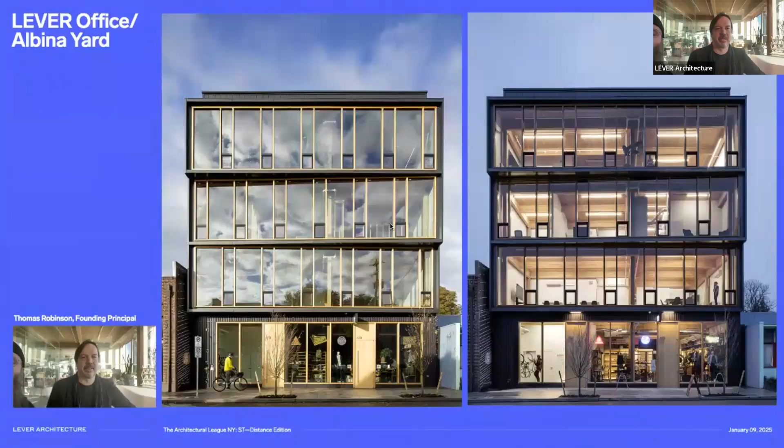I assume you can hear me. If you thumbs up, that's good. Yes, we can hear you. You can hear me and you can see me, I hope. So I think we're good, huh? No, I'm trying to just 1 second. Oh. I had 1 second. Okay. Fine, we're good, I think. It wouldn't be Zoom if there wasn't a little technical glitch to start out. So thanks very much to everyone for being here today.

And I want to welcome you to Lever's office building in Portland, Oregon, where I'm actually sitting. We call the building Albina Yard, which is named after a major rail yard that's about a mile away from here. And this is the front elevation on Albina Avenue in the Albina neighborhood. We're super excited to have you virtually visit, meet our team, and hear about a few projects. I also want to give you a quick introduction to the history of the firm and how our design approach has evolved over time, really through the lens of this building, and then expanding out to talk about a number of projects, many of which are within a few miles of where I'm sitting, and all of which have been completed since 2016.

So this is our office. This is where we sit. This is an early picture, so it's very clean. You'll see some video to show you that it's not this clean anymore. But what was important about it is at the time, it was the first building in the United States to be built with domestically sourced cross-laminated timber. We had to develop details that no one had ever touched before. And this is one of them you see on the right, a detail connector that's very elegant, but also works seismically. We were really interested also in how we could express the material qualities of CLT. So that's cross-laminated timber. You've probably heard about it. And that's the panel you see hanging in the air.

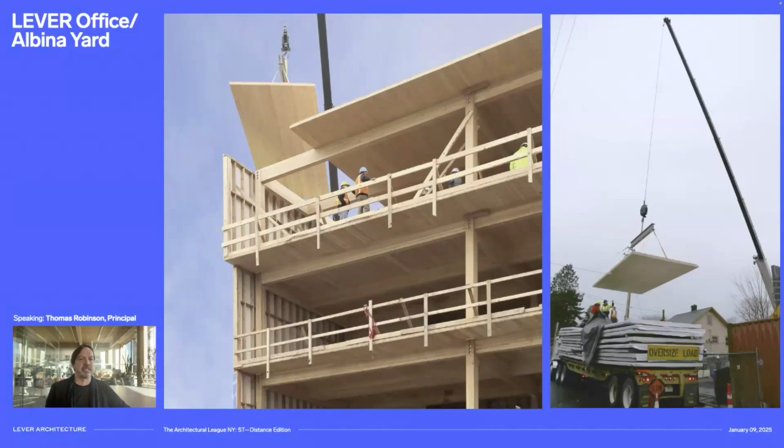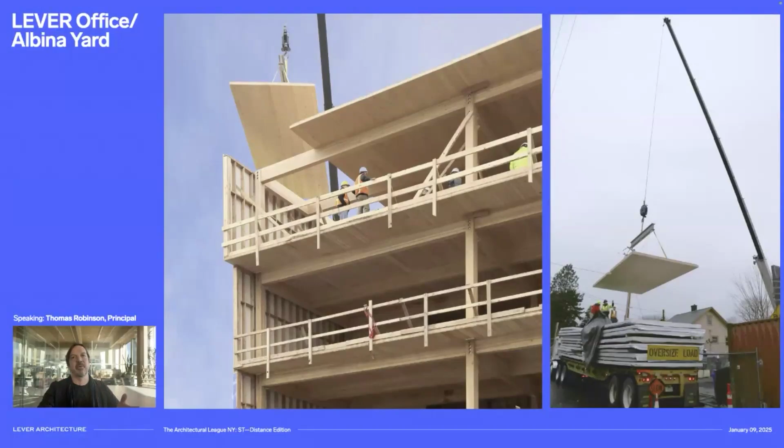And it was really the first time we'd used these materials. So we're like, what can this material do differently that's maybe specific and could have an architectural expression? One of the things we found is that this 4¼ inch panel can actually cantilever 4 feet. So that really became the expression of the building. You can see on the right the first panel being lifted off the truck in this urban condition. And you can see that sense of an undulating presence where you go from 4 feet to 1 foot. That really is, in a way, the one move that defines the character of Albina Yard. So something that's expressive of this material, but also has a presence urbanistically, this idea of thinness, but also strength.

Our site is quite unusual in that it's actually a flag lot. So we were working with the developer, who's a friend of mine, and actually the contractor for the project. We were able to create this courtyard. So there's an existing building on the corner, and the building kind of turns around it.

So in addition to doing this first of its kind mass timber building, we did the first sort of installation of recycled containers in Portland that met the building code. So those containers actually contain offices upstairs, but also a shared conference room for the entire building. And, as you see here, we're walking into that courtyard in the flag lot. And this is really a great space for social events, just getting outside.

Our shop is actually located where you see that neon sign. Originally, there was a bar there, which unfortunately is no longer. But now that's actually where our shop is. And that connects directly to the vertical stair. You'll see the person coming down in the red shirt. There's a circulating stair, which looks like this. That's our main stair. It's also a fire stair that I'll be taking you up later in a little video.

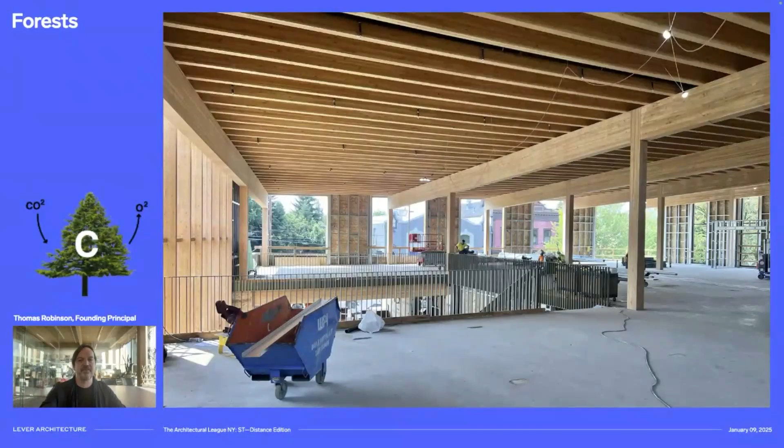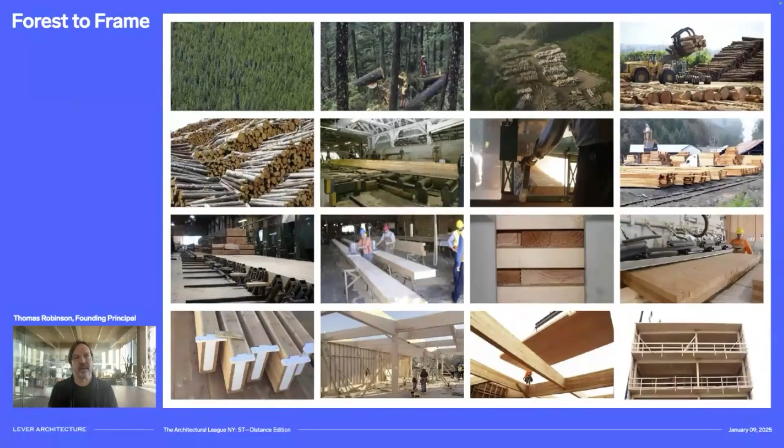And the opportunity and the choice to build with this incredible timber from this region and also other parts of the country that we're working to develop is what we've really leveraged in our work. And in 2015, we came up with a name for this process called forest to frame. It's an obvious play on farm to table, and we don't mean that in an elitist way. Forest to frame is really digging into the supply chain. So this is just a map of forest to the frame. And I'm actually sitting in the top of that building you see there on the right, and really mapping that supply chain and thinking that that's a place that you can actually be creative. And we're really inspired in many ways by incredible chefs that are out there cultivating their own ingredients to think about how they can create new experiences. And we feel that kind of ethic can be really inspirational for architecture.

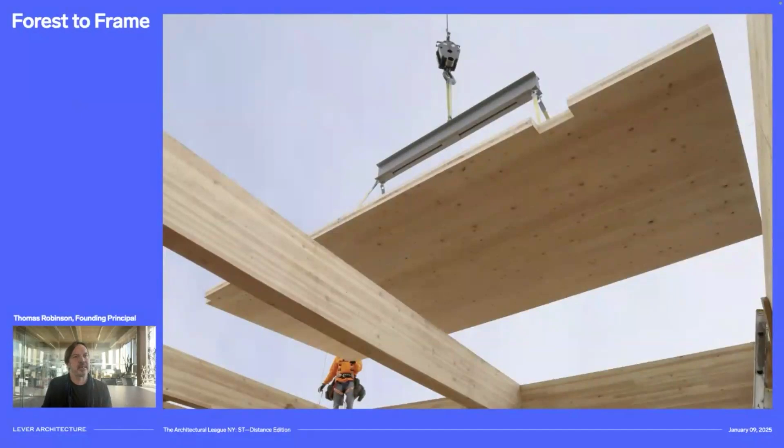So 10 years ago, it's hard to believe, we started to hear about a new material originating out of Northern Europe called cross-laminated timber, or CLT for short. And it's a prefabricated panel you see hanging in the air. And this is a picture I took of this building. And we also were hearing about efforts to fabricate this material in the United States. And a small group of people here got together, got a grant of $250,000, and a glue laminated timber manufacturer took it on and built this press located 3 hours south of Portland that could make a panel 10 by 25 feet long.

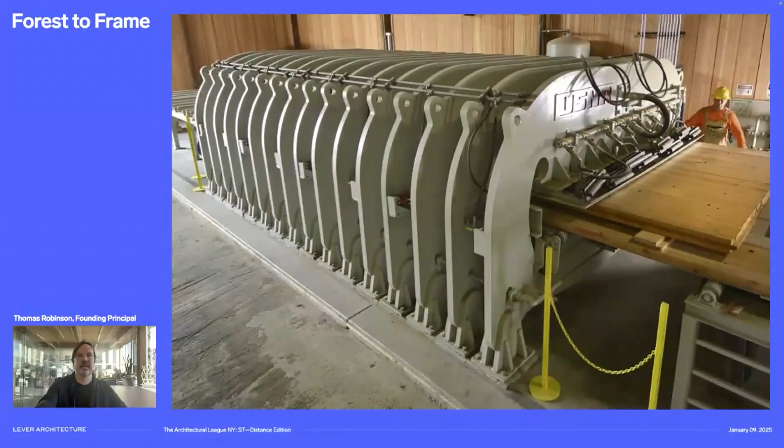And that was like a watershed moment in the United States, that we could actually use this amazing resource locally. So before I take you up into our office, I want to just share my favorite image of this project. It's not of the building itself, because I think it hints at a new way of thinking about buildings that is relevant both here and anywhere where there's that connection to that forest landscape.

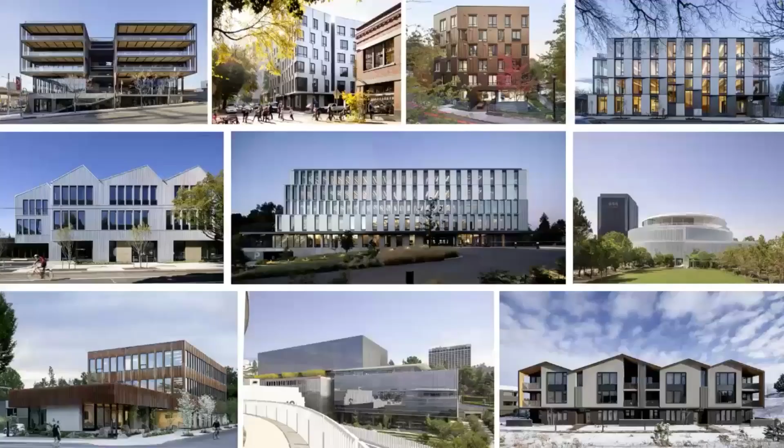So from a handful of projects in 2016, including this one, there are now over 2,000 mass timber projects under construction or built in the US. And that's a pretty staggering amount, and it's continuing to accelerate. So these are some of the projects, timber or otherwise, that all have a connection to that ethic of construction, that are complete. And these are projects that are on the board, about to be complete, or in construction.

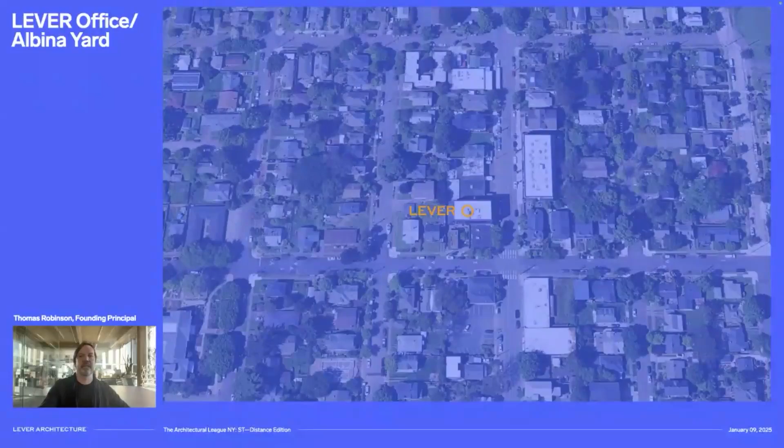And I think that will take you through zooming in here to our office. So you went from that bigger view, and now we're zooming right into our office where I'm sitting right now. And this is a drone video of our office.

And on the left, you see here, there's an amazing coffee shop called Albina Press. And I go there every morning to get a cappuccino. I did that actually this morning. And they're incredible craftspeople. They've actually been here longer than we have, making cappuccinos for 10 years. And I think that idea of craft and experience is something that's really important.

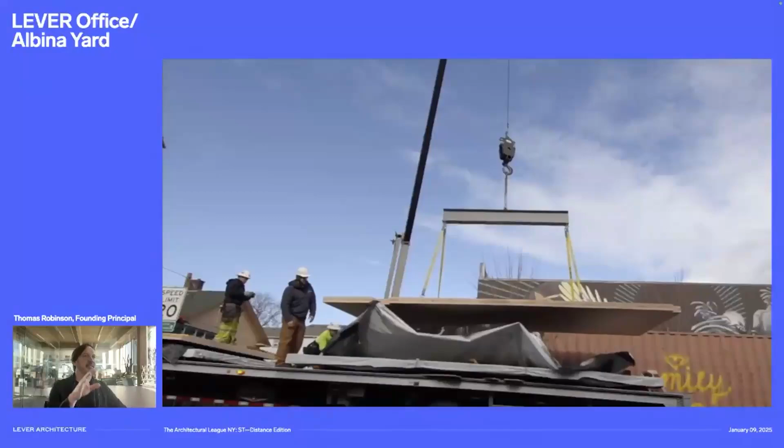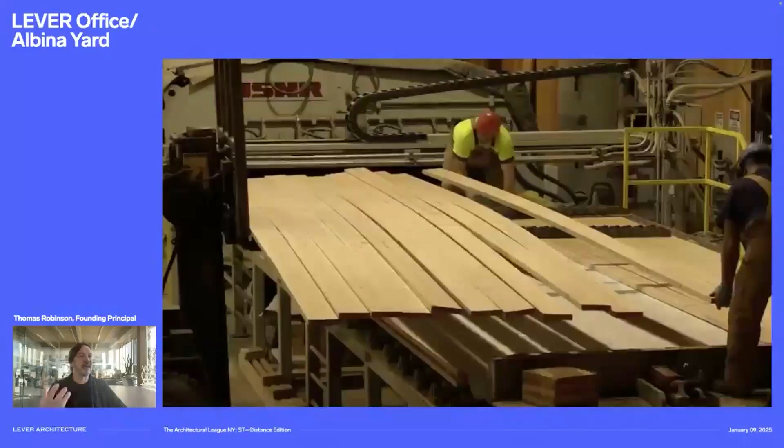And this video actually has an intercut with images of the construction that happened in 2016. So you'll see these panels being installed for the first time in an urban environment. And then you can also see that it was really done by hand. At this time, we didn't have the CNC fabrication that many people have today. So this is really a very specific time where we're really trying to think about how we can do this type of work. I'm actually walking through the courtyard. I'll be going up the stair and ending up in the conference room here.

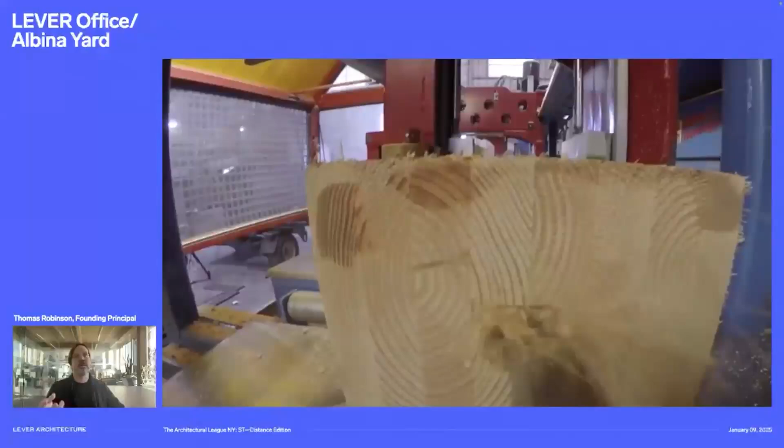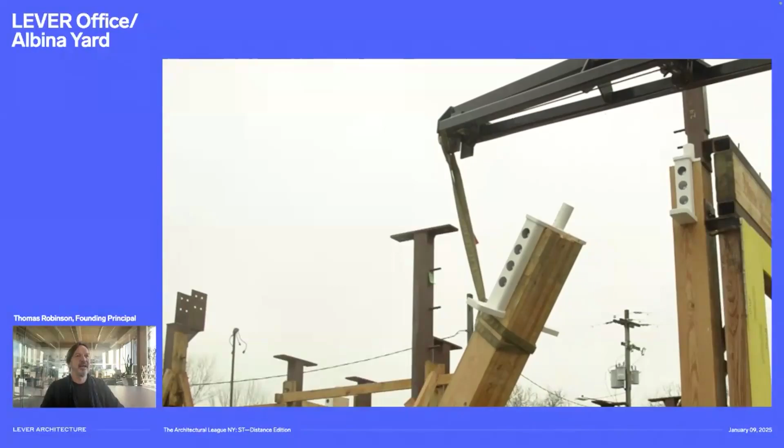We were really fortunate to have in Portland one CNC machine run by a Swiss-trained timber engineer, and this was Stefan Schneider. And he helped us machine these elements that had never been done before. And one of the great stories is that we were talking to the manufacturer. They said, who's doing the shop drawings? And we were like, I guess we are.

So basically we took that on, worked with Stefan, and did the shop drawings for this building, because we realized that for the kind of climate and the culture here, glulams were a commodity. They'd never worked with an architect before. So we really had that opportunity to connect with them.

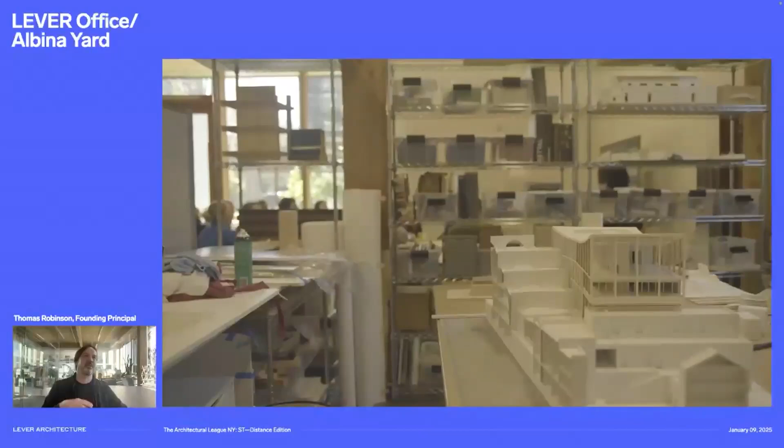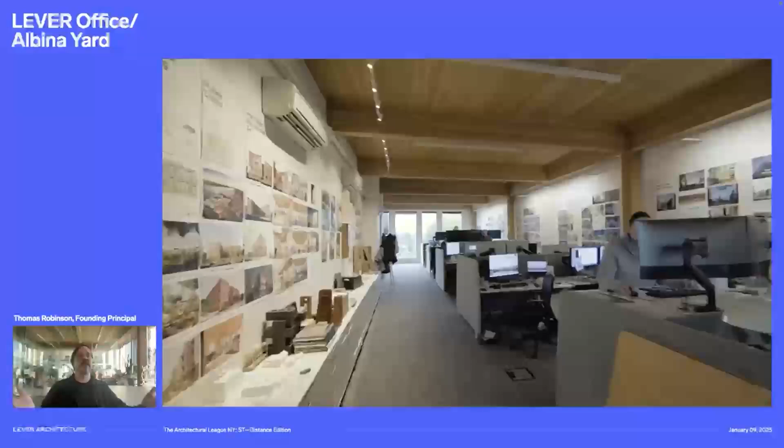This is our model shop on the ground floor that I mentioned earlier in that view. We have a great laser cutter. It's also a kind of kitchen space. And this is just me walking up the stair. I do this pretty much every morning. And coming into the side of the office, which is on that side of the flag lot. And this is a view of what the office looks like today. It's a little messier than you saw in those earlier photos.

We have a kitchen space in the back, but I wanted to just point out there's these amazing details that really define it. And there's also this great smell. When people come into our office, it smells like timber. I don't think we smell it anymore, but other people do. And there's always pieces of material around. And one of the key things we have is a library in the center, so there's always that resource there.

And then this is actually what I'm looking at right now, if I turn my head and look this way: Mount Hood. It always looks way smaller in the photographs.

I don't know why, but it's actually really present in the city and something that's really part of the culture of the office, really that visual connection that we can actually see where the forest is relative to our building. So I'm going to hand it off to Chandra.

All right. This is when we get to do our musical chairs, which is actually kind of fun, very choreographed. Welcome. I'm really so excited that you're all here visiting us in our office.

And I'm Chandra. I'm a principal here and I grew up here in Portland, and I'm really passionate about work that serves the community and work that expresses culture. So I'm going to talk to you about our office culture and about projects that are here in our neighborhood.

So if you were here in our office with us, this is kind of what you would see, people hanging out together. There's a really good mix of different folks here, people with young kids, people who are recent grads, and we really like to hang out together. We actually eat lunch together, not at our desks, but in the kitchen at our table. We volunteer together. We have weekend events and even pack meals for kids on the weekends, which is a really fun volunteer thing that we do together.

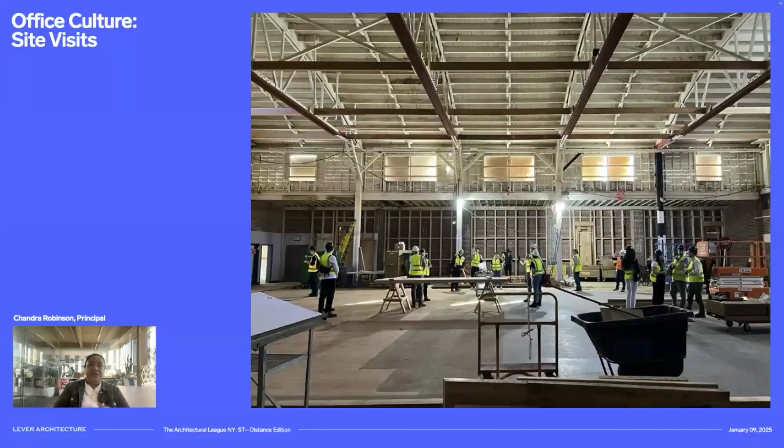And we also do a lot of project visits. And what's really cool is, we're really fortunate to do a lot of work in our own neighborhood. That means that everyone who works in the office has the opportunity to visit all of these projects in person under construction and really see all the time that was spent in the crafting of these details, see them come to life and feel what the building is supposed to feel like, which is not something you get to do as much if all of your projects are far away. So I think we're really fortunate to work in our neighborhood. So again, here's our office, and I'm going to share a few projects that are here in our neighborhood.

Our neighborhood is called Albina, the historically Black neighborhood in Portland. Like in every other city in America, the freeway was run through the Black neighborhood, and a lot of land was taken through eminent domain for reasons they said there was blight, or a hospital needed to expand. So they were taking the land, and a lot of businesses and homes were razed.

Right now you can see all of these projects in this neighborhood that we're doing. There's at least 10 that are really close to the office, and we have more that are farther away, but these are all projects directly impacting people in our community.

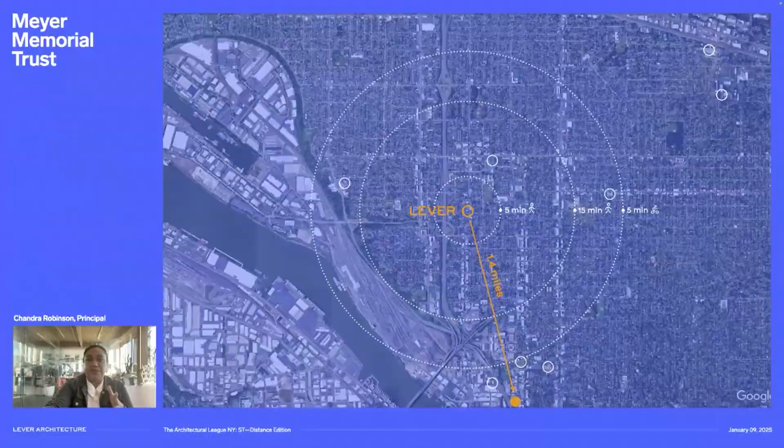So we're going to first go to one of our projects called Meyer Memorial Trust. It's really close to the office, and this is an office project. This is the headquarters for a foundation that works here in Oregon to provide grants to organizations supporting community in different ways around equity, sustainability, and innovation.

The real idea behind this project is that it's very much about equity and sustainable wood sourcing. You can see on the map that all of these different materials we used on the project were sourced within about 70 miles of the project. The reason we do that is so there's an economic impact on all of our local rural communities, so that we're employing folks who are already in our neighborhood, but also so we can understand the sourcing of all these materials and who's actually producing them, milling them, turning them into products we're using, so we understand who we're impacting.

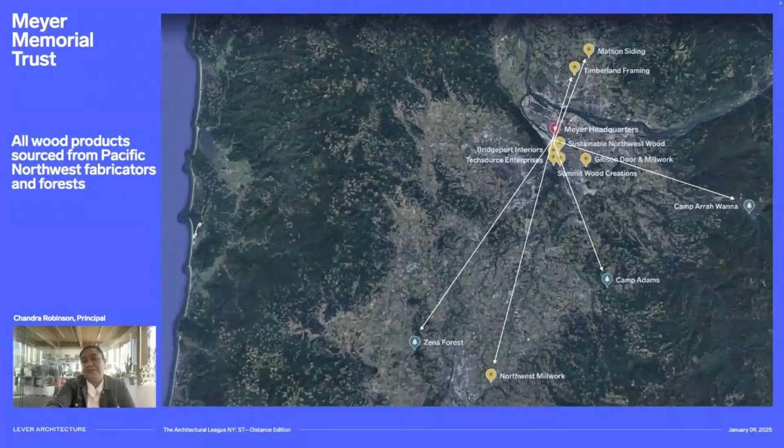We want to make sure we're spreading the wealth around and making sure minority and women-owned businesses are involved, and all of the money isn't just going to the biggest folks who are monopolizing. So all of these materials are coming from really close by.

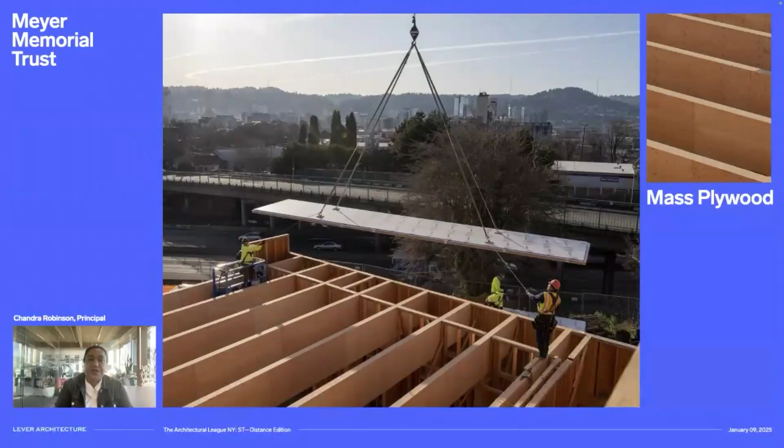Including mass plywood, which is an innovative material that is only made here in Oregon. Using this material is a way to support Oregon, but it's also a way to use something really humble and simple, but you can make it really beautiful. So we have this kind of space that glows with this wood and is not fancy, but is so beautiful and makes people feel really at home.

Some of the other local sustainable wood materials we chose were a locally produced linear wood ceiling product and locally produced wood flooring products that come from a family-run forest here in Oregon.

There's a lot of other things we did in terms of equity and thinking about how we designed this project. I think the biggest and most interesting is that the project is designed so it's partly mass timber and partly traditional stick frame. What that does is it allows us to involve a more diverse group of subcontractors to build the project, because they didn't have to have mass timber experience to work on this. By being on this project and doing what they're comfortable with, the traditional stick framing, they get to see how it comes together and get a foot in the door, so they can get on more projects and be more successful at bidding them.

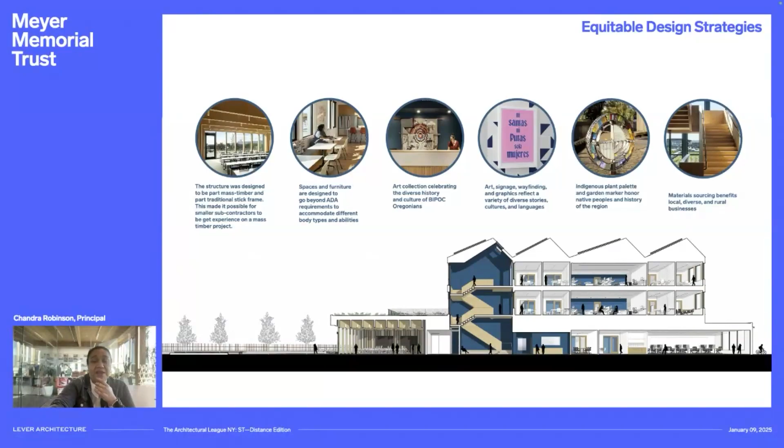The other things we do in terms of equity on this project are that all these spaces are designed with ADA in mind, but going beyond ADA, so all the spaces are comfortable for people of different mobility levels, different body types, and different experiences. There's a lot of really beautiful art in the building that was commissioned by Native American artists, and there's a fully native plantings garden on the outside as well.

So this project did a lot of different things, and it's got some really impressive stats. 80% of the scope of work was done by women and BIPOC-owned subcontractors. And it really started from the top. The client was really invested and wanted to hire a developer and hire Lever as the architect, because we were representing local folks as well and people of color.

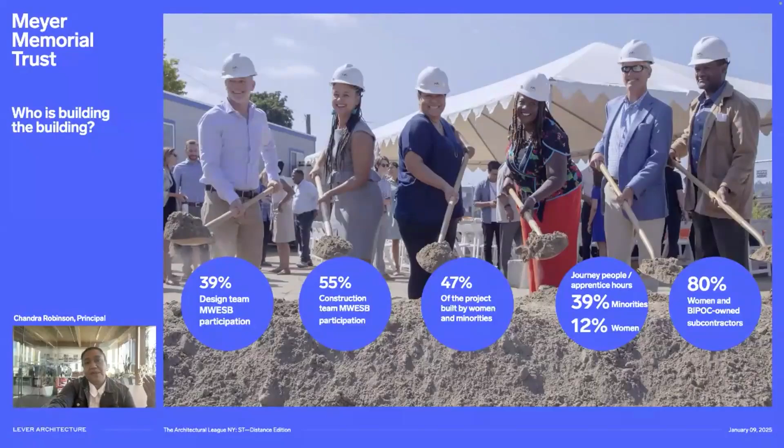It really came down to starting from the top, making these goals, and making sure they were all represented throughout the entire construction team. Really thinking about these spaces and how comfortable they can be, and doing all this work up front really allowed us to take something that was an old tow yard next to the freeway and turn it into something really beautiful that the community can be a part of.

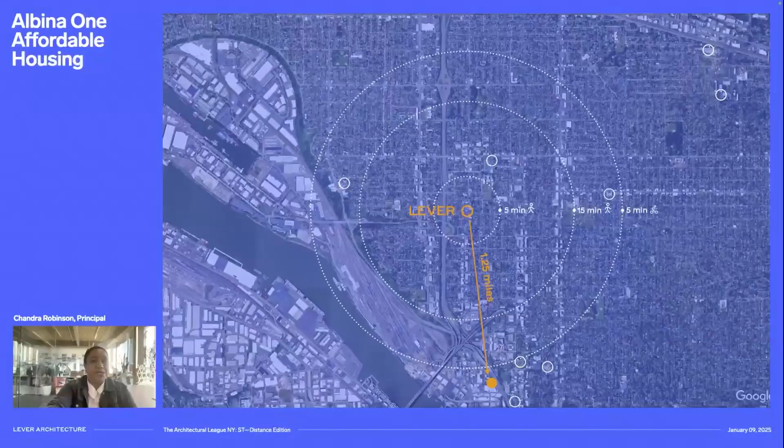I'm going to share a few other projects. That one was complete, but these others are in different stages of development.

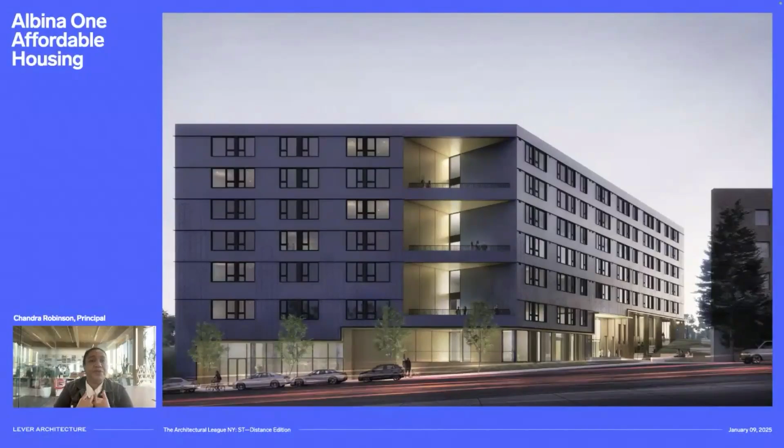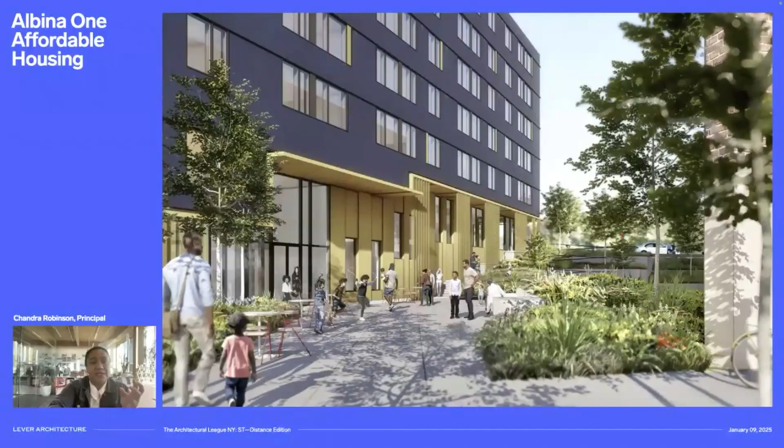This is Albina One, the first project in the Albina Vision Trust Community Investment Plan. It's affordable housing, and it's the first project to anchor a 96-acre area of development that will welcome back folks in the Black community who were pushed out after their homes were razed and businesses taken, and were pushed farther out in Portland. It's an opportunity for people to come back and develop this as a really joyful neighborhood for the Black community. It includes a really beautiful garden for kids to play in and for people to hang out, even though it's right in the city, very urban and next to the freeway, there's this nice little garden and a really special calm space.

Williams and Russell is another project very close by, and this one is not under construction yet. Albina One is under construction, we're working on the facade now. But Williams and Russell is a parcel where it was another one of those where businesses were razed, taken so a hospital could expand, and then 70 years later, nothing had ever happened with it.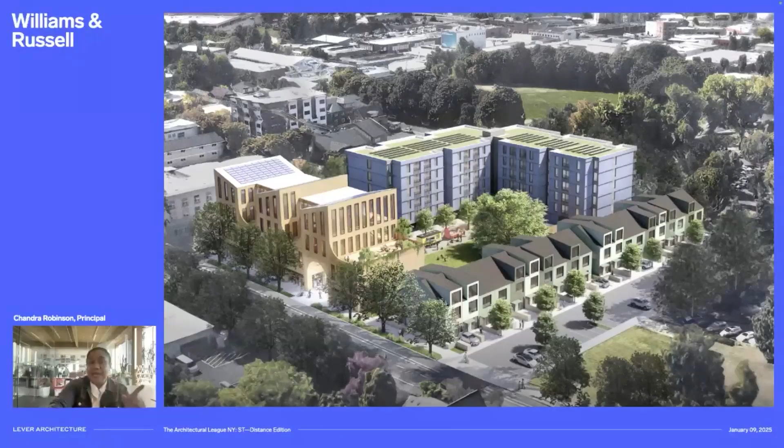So what we're building here is home ownership opportunities, you see those as the green townhouses. There's also rental affordable apartments, and there's a Black business hub, which is an incubator for Black businesses to get going, to get a leg up, and to start really progressing before they move out into the rest of the neighborhood. So we're really excited about this project.

It's so beautiful. And then we've got a couple of libraries as well. Again, these are all in Albina, in the Black neighborhood of Portland, so we're really proud to get to work on these.

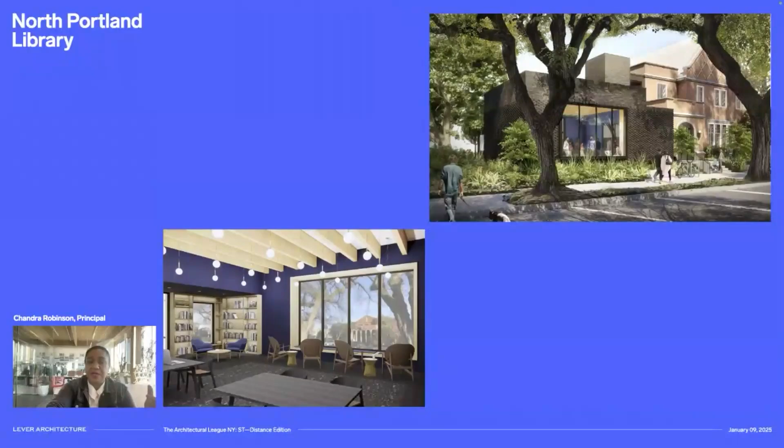This is the North Portland Library. This very small addition is the Black Cultural Center, focused around Afrofuturism and a place for community to come together. It's under construction, they just got C of O, and it'll be open in February with a grand opening. I'm really excited that people are going to get to come in and see this really beautiful space that's been created. And then the Albina Library is another library we're working on in the same neighborhood.

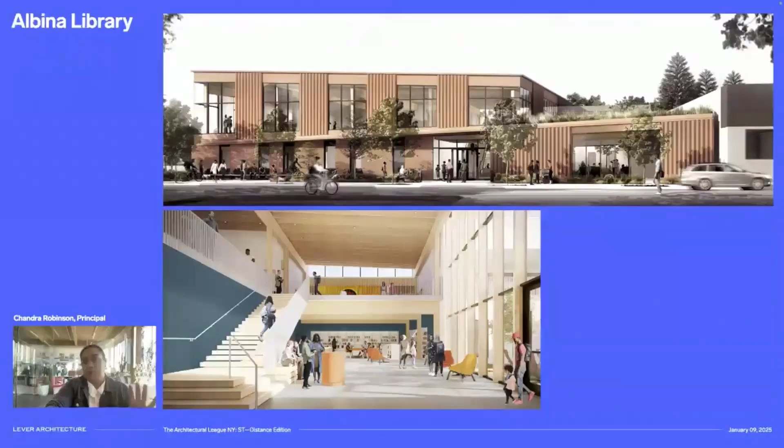This one is also an addition to a Carnegie building, a very large addition, 30,000 square feet. It has a big outdoor courtyard and some really beautiful canted brick on the exterior. We're really excited for this to be done later in the spring.

And now I'm going to hand it off to Michael Gastineau, and he's going to talk to you about Portland State University. Thanks.

Hello everyone, my name is Michael Gastineau. I'm an architect here at Lever, and I'm going to take us now about 4 miles south of our office, across the Willamette River, to Portland State University's campus in downtown Portland.

This is the new Schnitzer School of Art, Art History, and Design. It's a 4-story, 100,000 square foot mass timber structure that brings together the university's various arts programs for the first time all under one roof, which in itself is very exciting. But the project also represents an important investment that PSU is making in their urban campus and the downtown area at large.

We are actually occupying a full city block, and we're situated in a really wonderful location at the south end of what's known as the park blocks, this linear green space that connects the city on this north-south axis. So that site acts both as a gateway to the campus, but also as an anchor to a growing and thriving downtown arts district.

So in bringing all these programs together, there's been a real spirit of connectedness that's permeated the design, and I think has led us and led PSU to want to bring this program out to the urban and the cultural context through the arts.

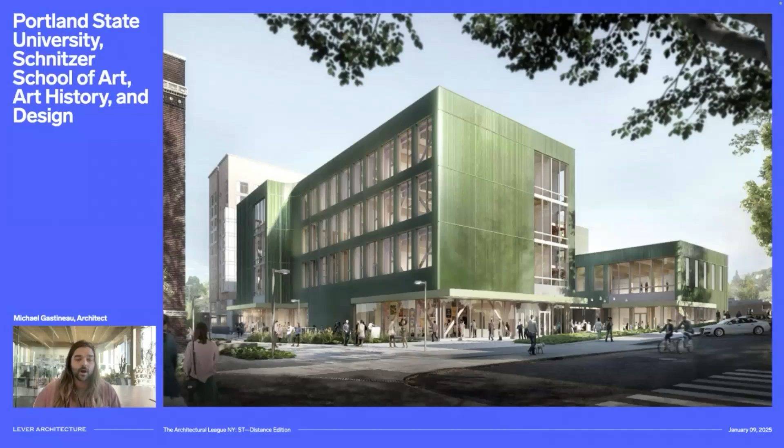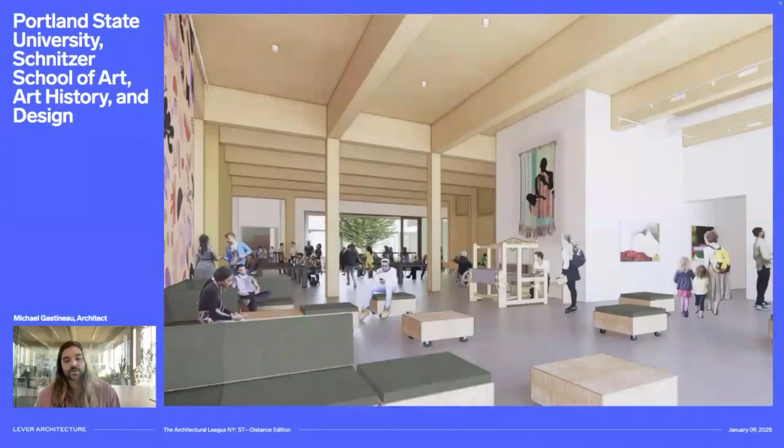Throughout the design process, Lever also worked with a diverse cohort of BIPOC students and educators within the college, and we gathered data that helped inform various aspects of the project, so we understood and explored how we make spaces for learning that are more equitable, more approachable, and ultimately better for creation.

Some of those architectural goals that we came up with included things like ample natural light, things you would expect for an art school, a great connection to the outdoors, spaces that feel like they can get messy and be used. That also led us to organize the program around a series of galleries and common spaces that occur at different scales, but really promote that sense of cross-pollination amongst these programs.

We also employed tall 15 and 18-foot floor-to-floor heights, which allowed us to bring in full height glazing and then bathe these 40-foot deep structural bays with ample amounts of daylight.

But in trying to embody that idea of forest to frame, I think one of the things I'm actually most proud of with this project is that we're able to source the majority of our glulam materials from tribal forests that are owned and operated by the Yakama and the Umpqua tribes, both here in Oregon and in Washington State. And that's a degree of sourcing that wouldn't have been available a number of years ago, but is now, I think very excitingly, becoming more and more of a focus across our projects.

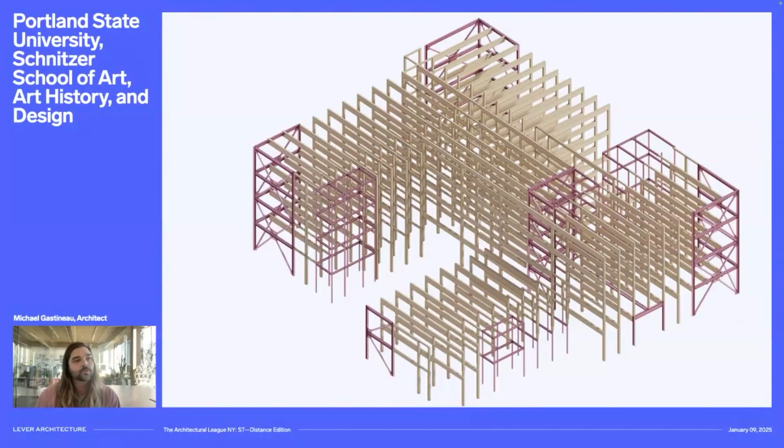At Lever, we're also intensely interested in how our buildings come together, and we try to embrace the mess that comes with that process and have fun with prototyping. Sometimes that means you just got to throw a happy hour.

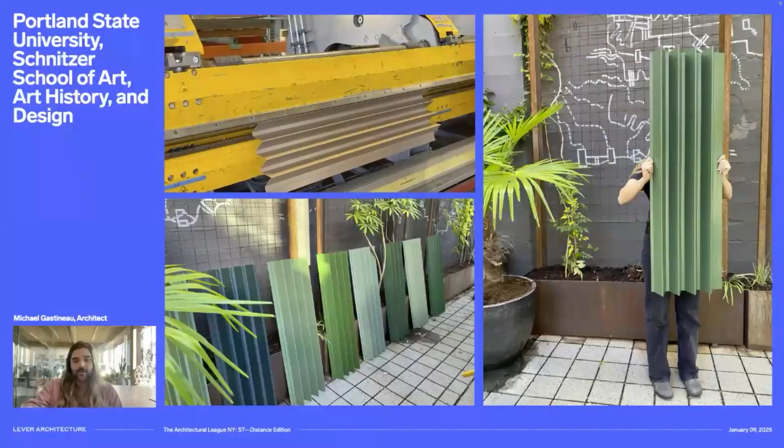So for PSU, we got together with a bunch of our material mock-ups that we worked on and got the whole office to vote on the best shades of green for the project. Aptly enough, the winning color that you see on the right there was named Doug Fir Green.

We are currently under construction and broke ground last fall.

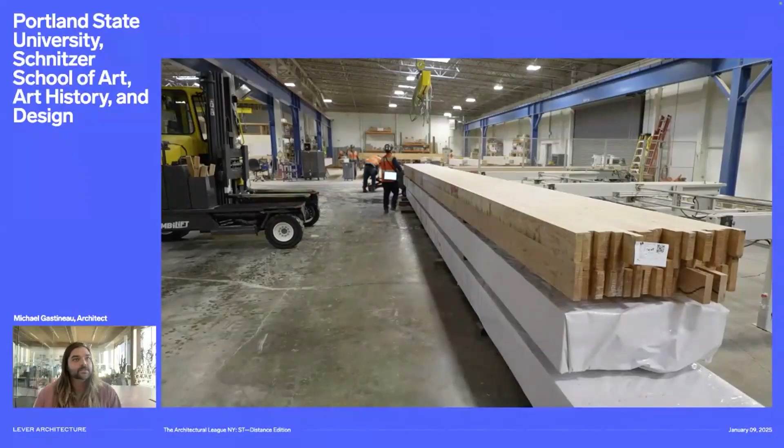So I'm going to take us now to look at Timberlab facility in North Portland, where our glulam materials are being finished. You'll see our 40-foot long spanning glulam beams, a number of various glulam columns, and various fittings being installed. Timberlab is able to achieve a 1/8-inch tolerance with these materials, which is really incredible.

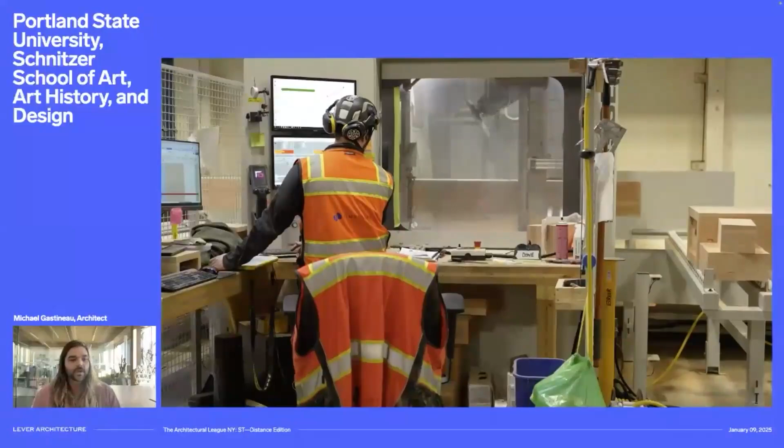One of the ways that we facilitate that is this in-depth pre-construction and coordination process where quite literally every bolt, every connector is independently modeled and accounted for. And in our case, I think we had almost 1,000 CLT floor penetrations that were also organized and coordinated in advance.

But I should say for all of the high-tech processes that we engage with, I think at the end of the day, my favorite detail on the project just ended up being the old-fashioned mortise and tenon connections that we employed for our primary glulams.

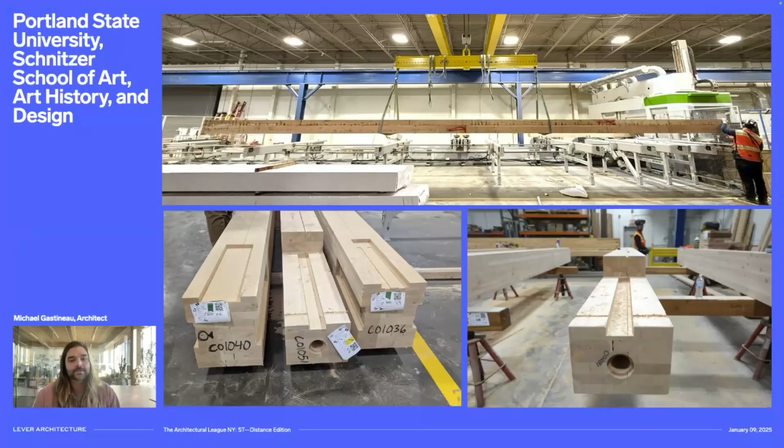So we are scheduled for completion in May of 2026, and we're all super excited to be seeing the building come to life. Thank you all.

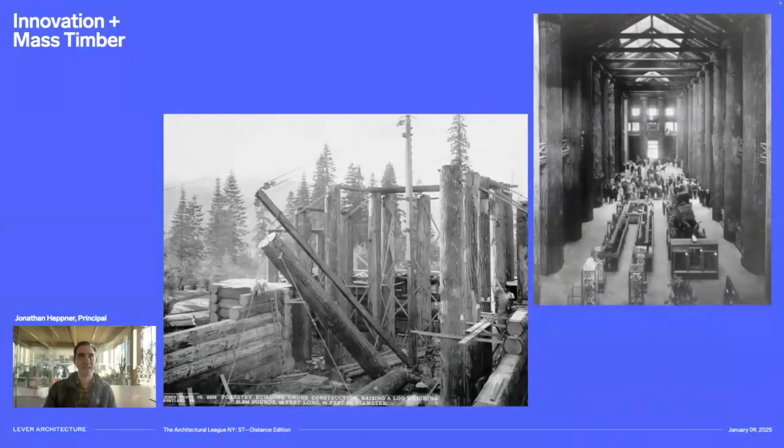Our journey in timber research really started in 2015 when Lever was awarded the Tallwood design competition that Thomas mentioned.

So this is for a 12-story high-rise that incorporated this rocking wall core, which is really fascinating, and I'll talk about a little bit more later. But the competition organized us to demonstrate that building high-rise structures like this were possible in high seismic areas. And it included $1.5 million of grant funding to do full-scale testing.

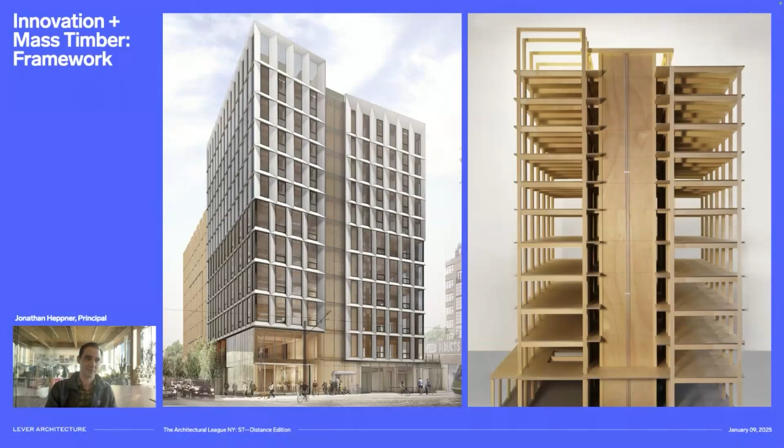And if you're interested, there's a model of this in New York and some other mass timber projects at the Skyscraper Museum through the end of this week. So check it out.

So I was fortunate as a part of this to be able to do 40 full-scale tests around the country for acoustics, structural, and fire testing, so that we could demonstrate that this would be something that's codifiable. And the results of these were all made public, and really led to the adoption of the Type 4 building code that we're starting to all use around the country now, as well as the project getting permitted in 2017.

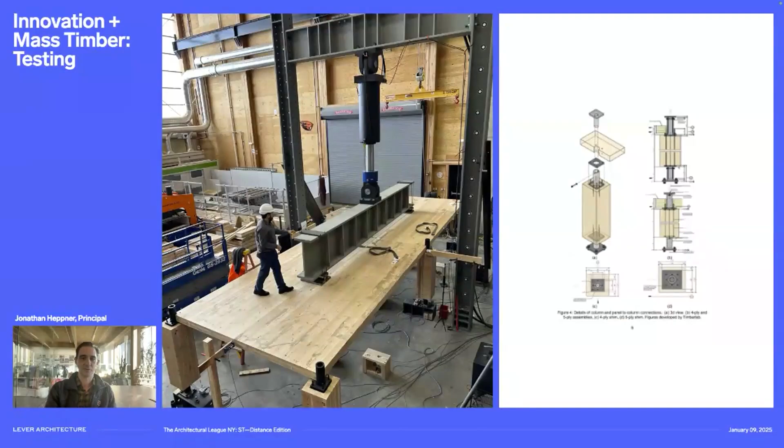So this is an example of some of the testing that we're doing currently over 8 years later. This is for a 12-story point-supported high-rise structure in Portland that is going through permit right now. So with that in mind, I'll share 3 projects that show a few other examples of how we look at our research in the office.

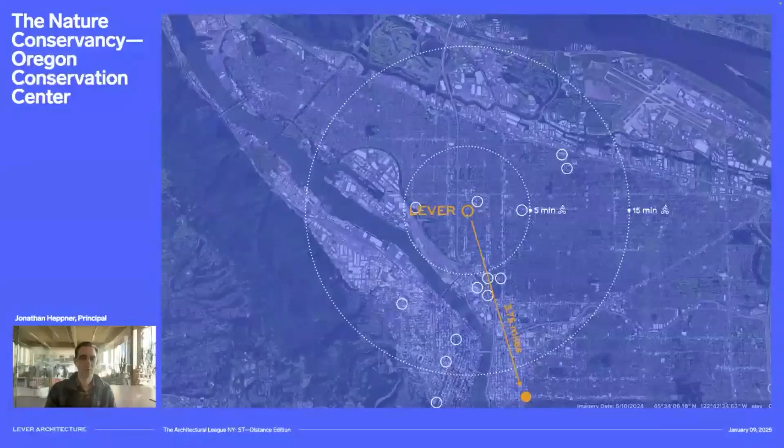And I'll start with the Oregon Conservation Center, which is the state headquarters for the Nature Conservancy. It's about a couple miles from the office. So the Nature Conservancy really wanted to have a building that embodied their values. And so conservation and restoration are key to their mission. And they wanted to also signal their presence in Portland.

So at the time of the project, they were occupying this nondescript building that was actually a former parole office, and nobody knew where it was. So instead of tearing that building down, we really wanted to look at it as an opportunity for restoration that was similar to their values. And so we looked at how we source materials very carefully.

So this diagram shows a few of the different conservation sites, the smaller bubbles down below, for landscapes that they manage in Oregon. And we wanted to take the materials that were in these landscapes and demonstrate their use within the building. So for example, the material of the outdoor roof deck, which is an FSC certified cedar board, is harvested from a site in Willapa Bay where they have a restoration project to sustain and protect old growth.

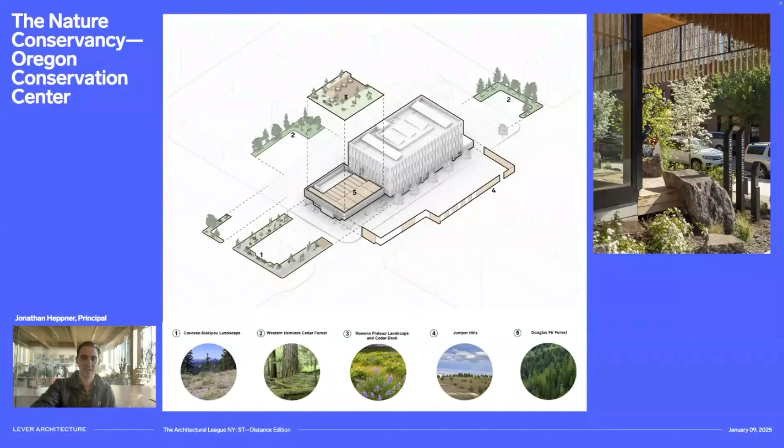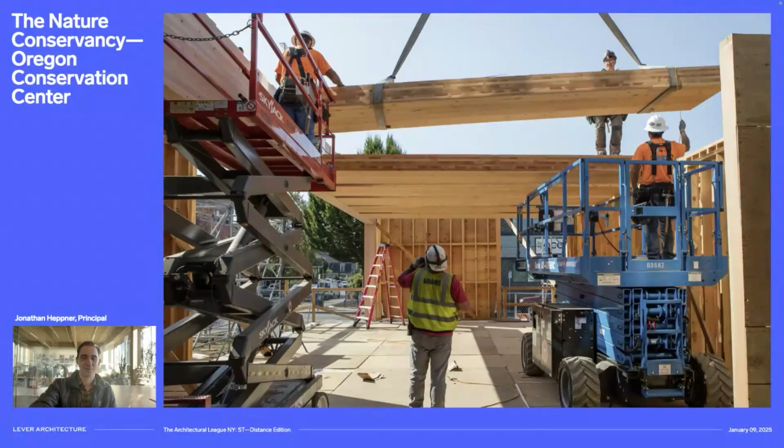We also were able to use FSC certified 7-ply CLT, which not only is a mouthful, but it's also a really cool thing to do for the structural roof. And it created this great convening space that brought people together to solve major conservation challenges. The load-bearing timber window wall that you see here was another really great innovative piece of this project that supported that big, huge piece of CLT that we saw in a roof deck above.

I think the biggest success story, and one of my favorite from this, is the juniper cladding system that we use for the entire project. It almost looks like concrete in this image beyond. Juniper is a tree that's native to Oregon, but because of fire suppression, it's become a major environmental issue.

The trees are very hardy, but they also suck up a lot of groundwater, which inhibits the growth of native grasses that threatened sage grouse depend on. So the goal was to develop a market for this juniper through this project that would enable the trees to be removed and restore groundwater back into the ecosystem.

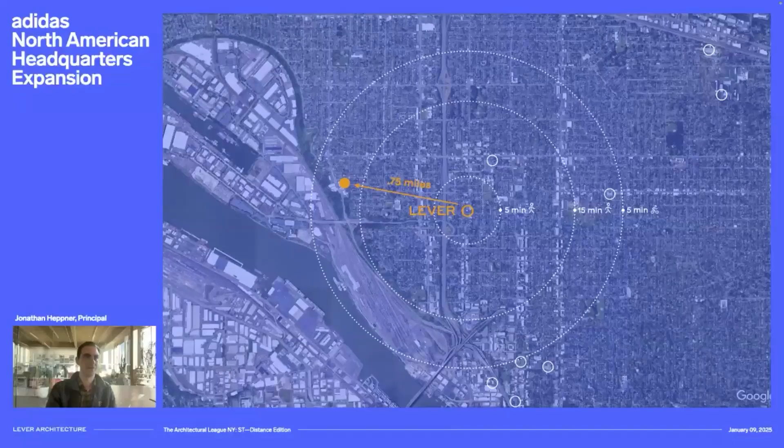So I'll move on from the Nature Conservancy and head to Adidas North American headquarters. This project overlooks the Willamette and is a mile from the office. It was a 450,000 square foot mass timber project that needed to be built in 23 months. Adidas was adamant about the delivery date and had a very specific and set budget.

So to build that quickly, we had to think about how to prefabricate all the major building elements, including the structure and the facade. This is one of the larger buildings, the Gold Building, that I'll focus on. The most innovative element that helped us meet this goal was the structural system for the Gold Building.

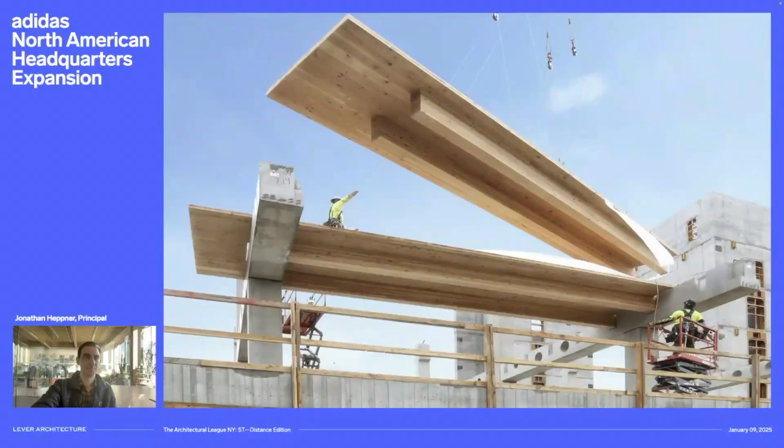It was a hybrid precast column beam system that uses a cross-laminated timber cassette that you can see being installed here. The approach enabled us to eliminate all the steel connection hardware and really speed up the construction process. And ultimately, it's just a hack on the typical precast parking garage where we take that wood cassette and swap it in instead of using the precast concrete plank.

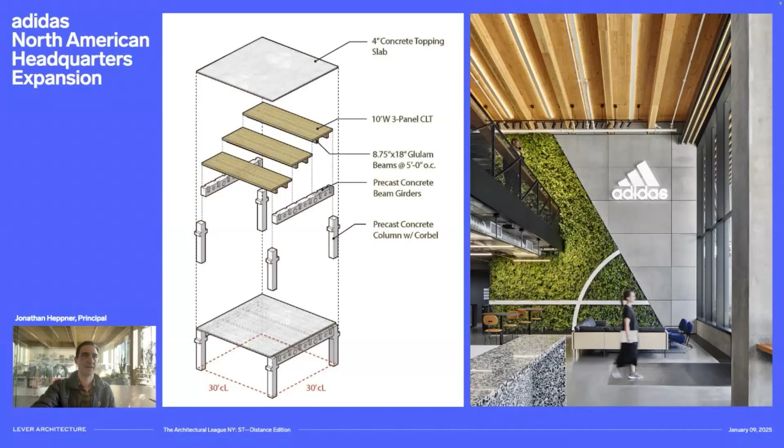Another innovation was the idea of this perforated precast girder that's up here in the ceiling. It allowed us to run the ducting and mechanicals through it and really allowed for a clean, uncluttered space that showed off the wood and allowed people to focus on the work and not the doodad hanging over their head.

So it also demonstrates the value of our approach to the client, in this case, Adidas, and was the key to the overall reduction in the schedule and budget, which in this case, I think was 3 months off the overall schedule with the structure being built in 6 weeks.

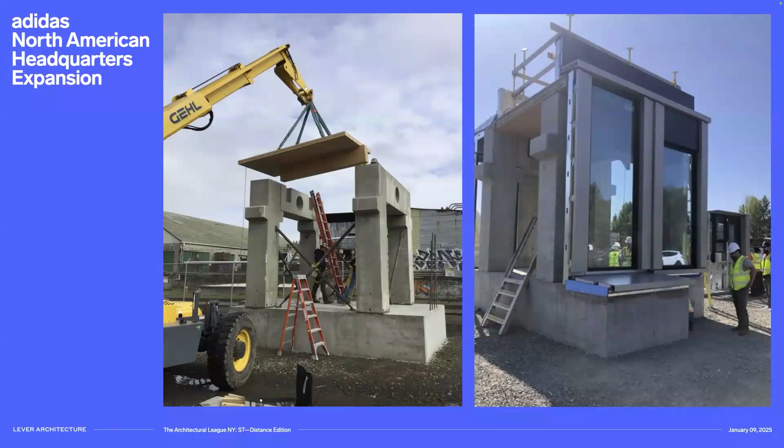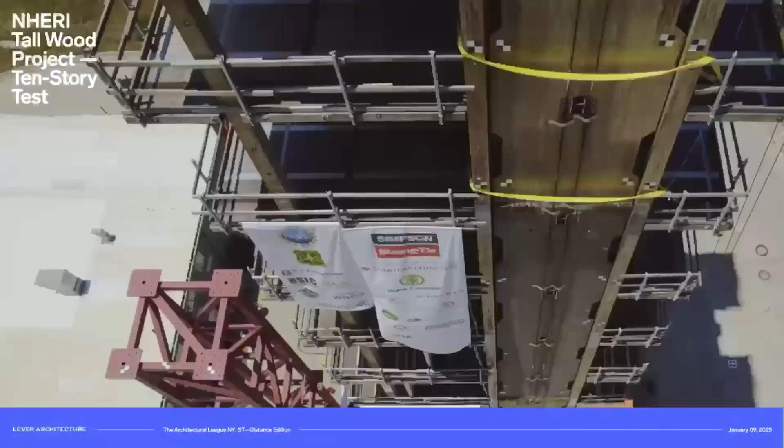So with that in mind, the final project I'll share is one of my favorites in San Diego, which is home of the National Science Foundation's largest shake table test. We joined a multidisciplinary team in 2016, funded by the National Science Foundation, to design a self-centering rocking wall system that's 10 stories, mass timber, and modeled on the Framework project.

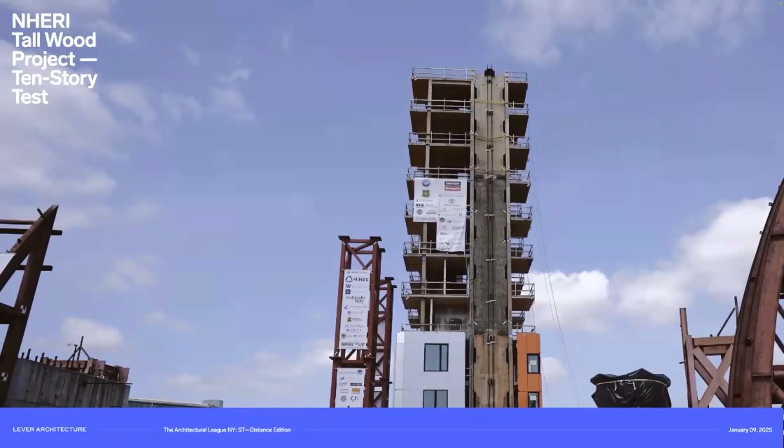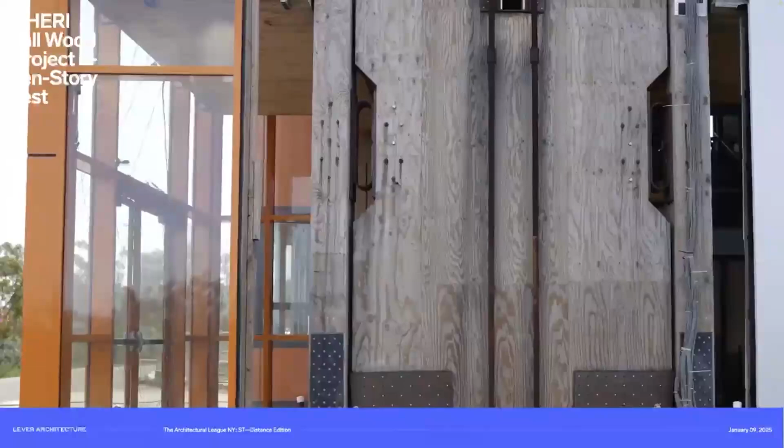So what this means is that the tower is vertically tensioned so that in an earthquake, the entire structure can move, but then recenter with absolutely no damage. So you can kind of see the movement of that in the video. It's the largest shake table test and the largest structure to be tested at full scale.

And the project subjected this poor tower to hundreds of earthquake simulations, including the Northridge earthquake of '94, with 0 damage. So with that, this project demonstrated the viability, and I would be passing to Haley, but I think Thomas will come back to share.

Thank you. I'm very hopeful that Haley's doing well.

But what it is, really, for us, is a new type of office building and mixed-use project that really leverages the climate and landscape that Los Angeles is known for, which is this incredibly temperate climate. And interestingly enough, technically, it's really a renovation because the project actually takes a windowless 1980s-era retail warehouse, sort of big box retail, and we basically scraped that, but then we recycled the parking garage and grafted this new structure on top of it.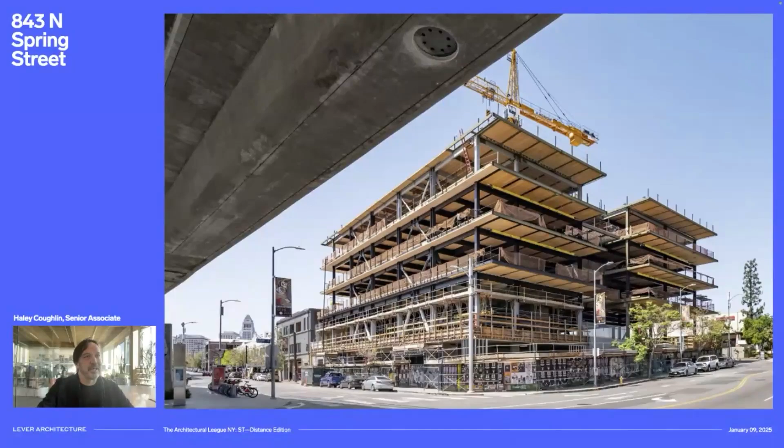And it's one of the first and largest hybrid CLT buildings in LA. And so, like Adidas, it is a hybrid, but it's really focused on CLT and steel, which means that it's actually a lighter structure. And we thought this was a great way to introduce timber to LA. So it's not all in timber, but it's really sort of leveraging these things.

And one of the things that was most exciting for us about it was this CLT and steel cantilever. We were able to do this really slim space that can be shared outdoor balconies that really wrap the building, contributing to the distinctive look that you can see from the subway as you're coming by. I would say the best view of this building is actually from that location.

And I think one of the things we were really keen on is integrating this idea of outdoor workspace into every experience of the building. So you can actually walk up the building without going inside. And we started this pre-COVID, but now it's sort of become something that I think has been really embraced.

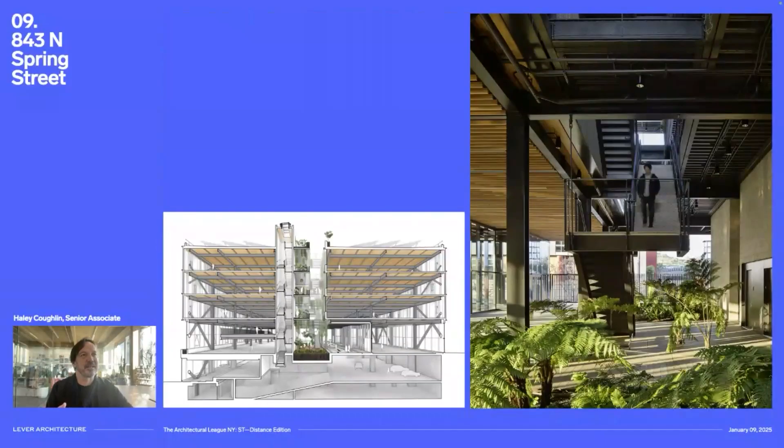And you can sort of see that in the images here of those spaces, this incredible garden that comes up through the building. And we worked really closely with James Corner Field Operations to sort of develop this really interesting kind of canyon-like landscape. We also have a lot of sustainability kind of elements. There's a 220 kilowatt solar array that will be up, and then we actually reclaim all the water from the building to irrigate this landscape you see here.

But one of the key buildings is really the Commons, which is modeled after a zoetrope, which is the origins of motion pictures. And within that, there's state-of-the-art theaters, a conference center, a commissary, outdoor spaces to work. We really wanted to blur the boundary between indoors and outdoors to really take advantage of the temperate landscape.

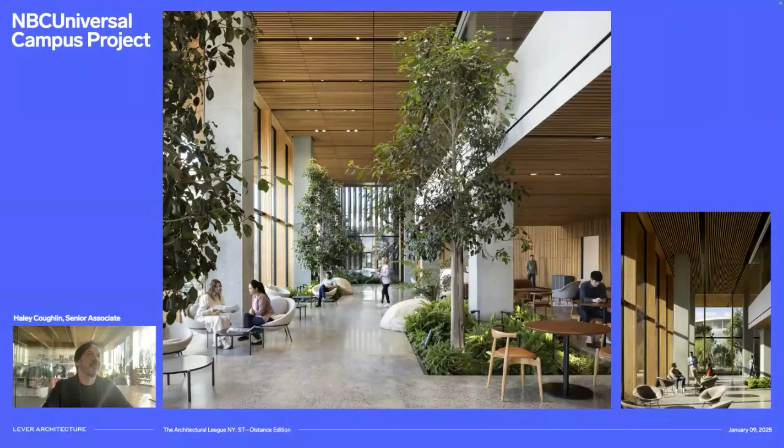But I wanted to also point out that we were really interested in doing this building in timber, but that wasn't really possible at that moment. So we really focused on the timber curtain wall that you see here, which is one of the first in a Type 1 building in Los Angeles. So in every project, I think there's an opportunity for innovation.

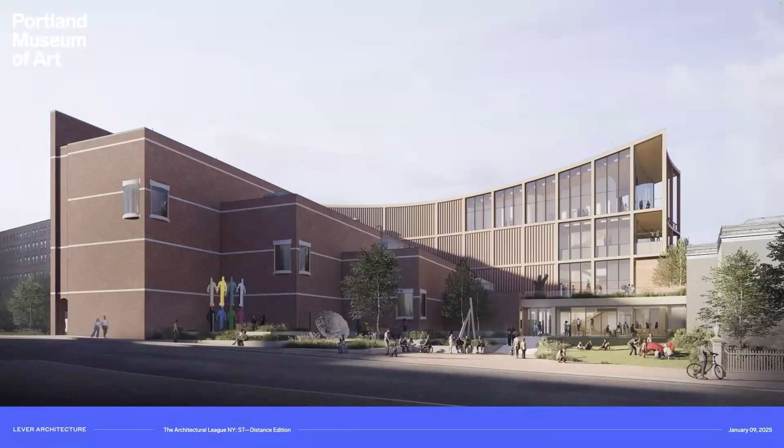So I'm going to come back to myself and complete our presentation with a project that is in the other Portland. So we're in Portland, Oregon. We're moving now to Portland, Maine. And the Portland Museum of Art was an international open competition that we won in 2022. And it was an addition to an existing Harry Cobb building, a partner at I.M. Pei, built in 1982, but it was also this whole idea of unifying the campus.

This is a campus that I think started in the 1800s with the House Museum and then evolved into a pavilion, and then the addition from Harry Cobb kind of came on. And so I think the project brings together so many of the ideas we've actually been talking about today, really this idea of innovation, this idea of inspiration in the arts, and then a real sort of sense of stewardship of the community and the landscape.

And I think for me, as somebody who's worked on a number of museums, it was really coming back to a program typology that was really part of my formative years as an architect. And there was a two-stage competition. And I just wanted to show you the pages we submitted for the first stage. And the big idea was this idea of flip the narrative, and it's sort of a metaphor of flipping the building, but also flipping your perception of what a museum can be.

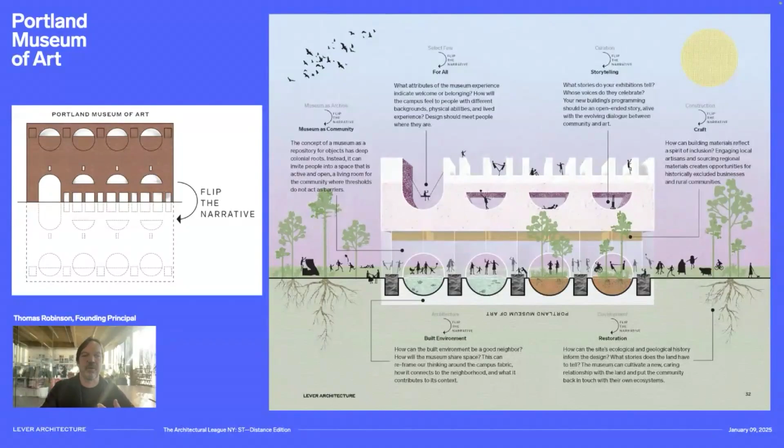So thinking of a museum, instead of thinking of it as an archive, thinking of it as a community. Instead of thinking of something for a select few, thinking of it for all. This idea of art for all was something that the museum really believed in and their programs reflected.

But I think one of the key things that happened during that competition phase is we were really fortunate to engage with a Native American individual named Chris Newell, who's also a Wabanaki tribal member. So the Wabanaki people have been in Maine for over 10,000 years. And really their purpose as a people is to greet the rising sun as it touches the northern continent each morning. And I think that was really moving for us.

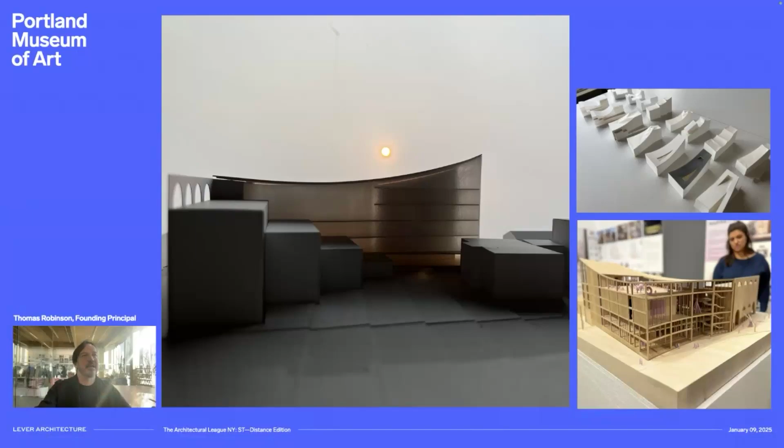And we were thinking, how can we create a building that kind of embraces that idea? And the shape of the roof really came out of that. And it really was meaningful to Chris, the idea that this roof aligns with the rising of the summer solstice each year. And so these are just some images of the competition, but it's the same idea, this campus unification and expansion that links these three existing buildings and the older original gallery pavilion you see in the foreground.

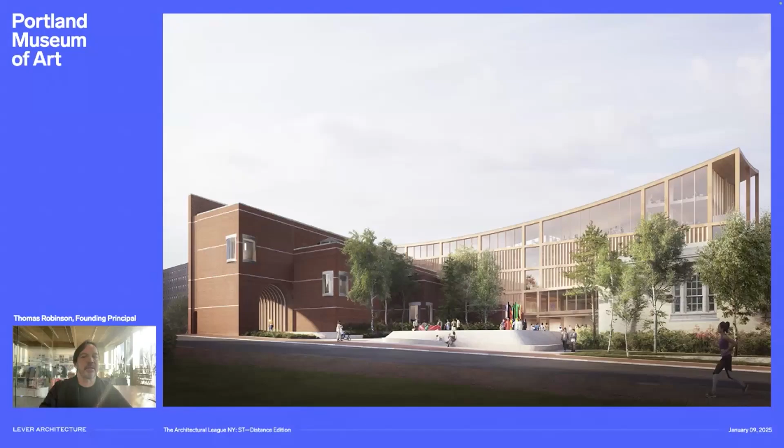And I think the museum has put a huge amount of work into engaging the communities in Portland and the state of Maine, but really thinking about how we could create spaces that leverage that narrative and build an open framework that is about creating spaces that open up and belong to the community. So we wanted the building to really open up to Congress Square. So something that's really solid becomes something that's more open, and that interior experience is also expressed.

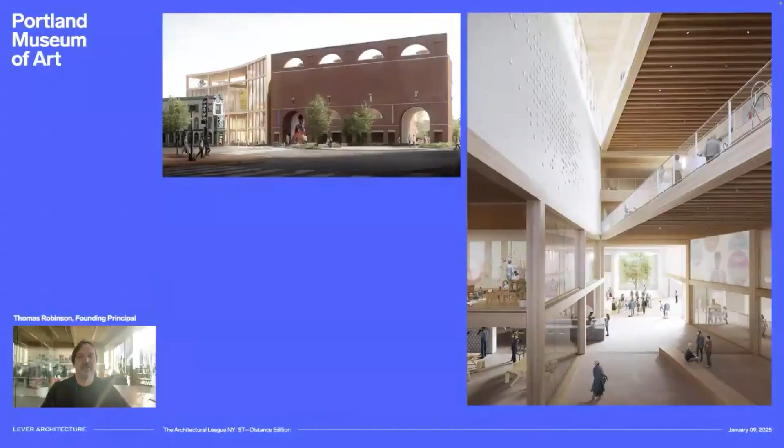The interior experience also expresses that programmatic idea of art for all, with the new Free Street that goes through the building, but also runs vertically up into the light. And this is an image, just super quick, that the actual jury took of us after we finished. And obviously we were really happy with how things turned out, and we were awarded the project.

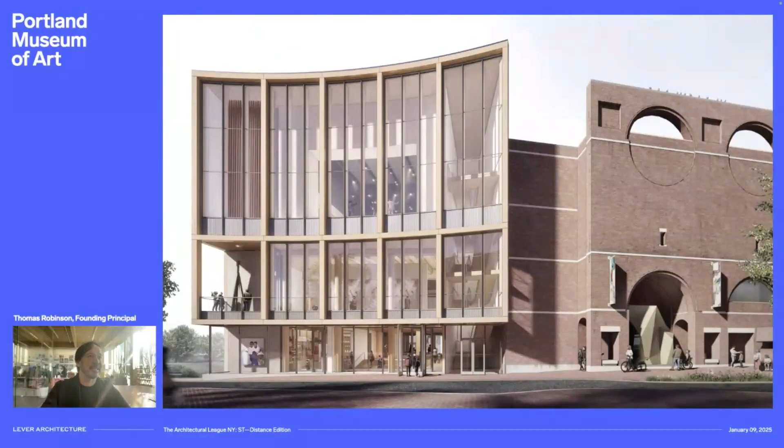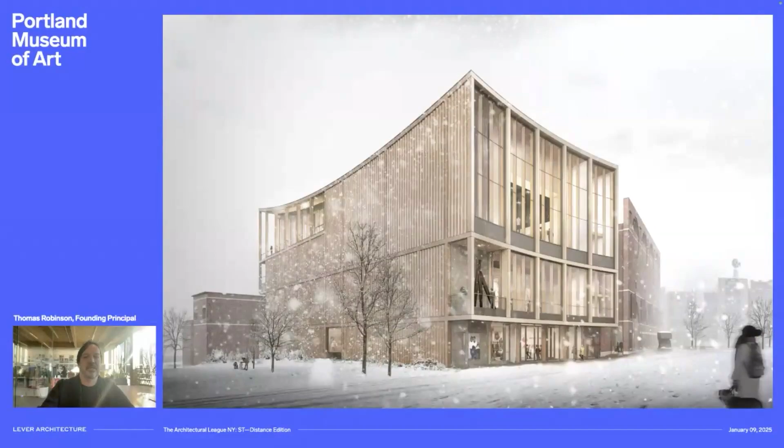I'm going to run through a couple of orientations of where the project sits now in terms of rendering. This is the view on Free Street, where the building opens up to Congress Square with these programmatic elements that can be open. So you have the multi-purpose space up top, the galleries in the ground floor, and really the life of the arts can be something that happens throughout the year and seasons. This is a new entry living room space that really welcomes people.

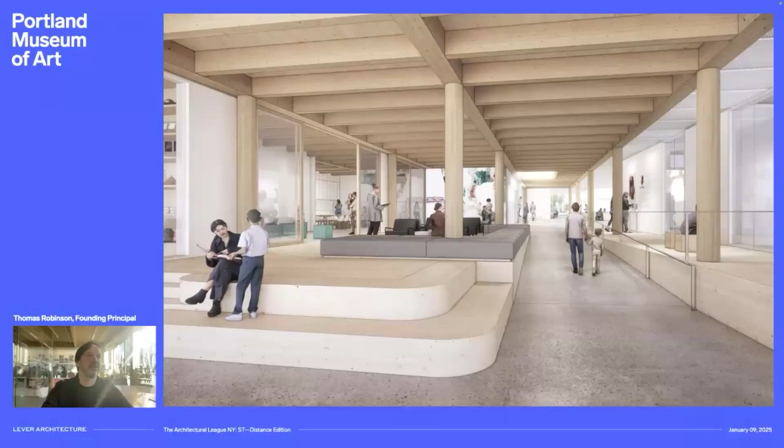But one of the key things was really this idea that we wanted to regionally source the materials. So we've been working really intensively with the University of Maine and others to make this happen. And then we took the former main entry lobby and basically turned it into a new second floor. And then I'm just going to run quickly through these.

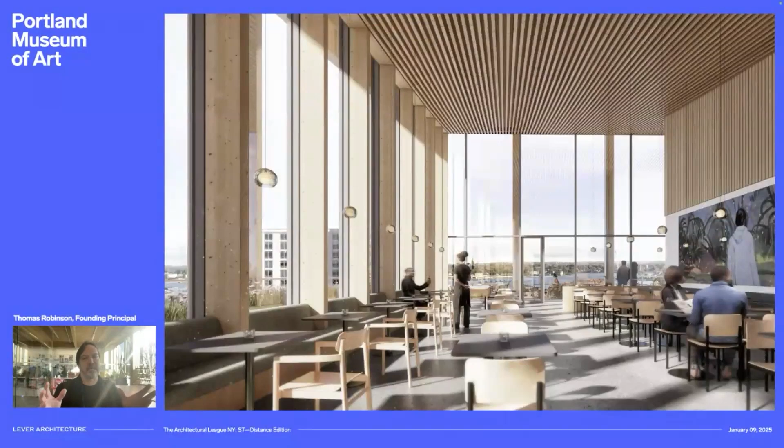This is the second floor, 8,000 multi-purpose gallery space, which is exactly the type of space they didn't have in the original building. And that's connected directly to a double height cafe space that has views of the landscape, and then backs up onto a multi-purpose event space and theater that connects directly to Congress Square. And the life of both these spaces becomes part of the urban fabric for all seasons.

But I want to end just thinking of architecture as a catalyst, thinking that this building can really have a regenerative impact that expands beyond its specific site, thinking about Portland, but also Maine and the Northeast, and the idea of stewardship of both buildings, but also the health of the larger landscape in Maine, and also the culture. And the fact that it is the most forested state in the United States.

And I think finally providing a place for the incredible collection that is very much inspired by this landscape, the Winslow Homer; it was so important for him to think about that landscape, and making that accessible to all.